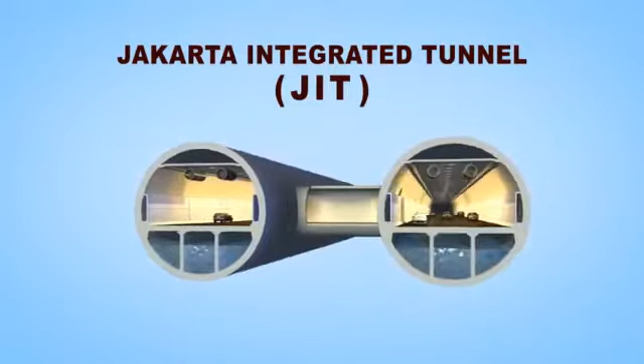Jakarta is the capital city of the Republic of Indonesia with a population of around 10.2 million people in 2011. But for the Jakarta metropolitan area, or Jabotabek, it has around 28 million people, which is the biggest in Southeast Asia or the second biggest population in the world.

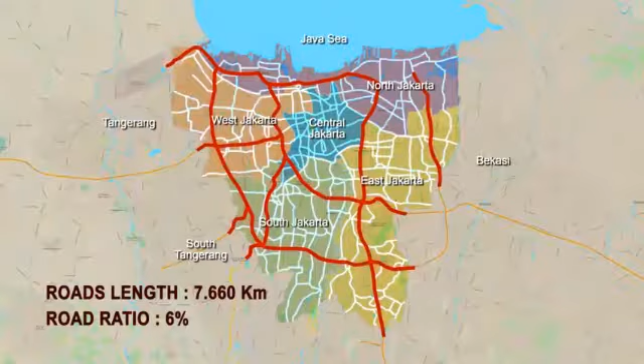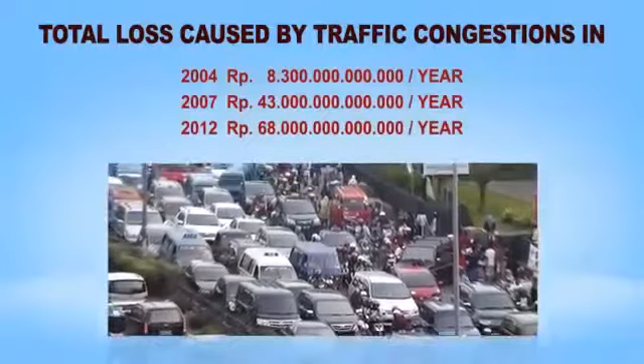Jakarta has only 7,660 kilometers length of roads, covering road areas of around 4,000 hectares. The ratio of roads in Jakarta is only around 6% of the city area. Total amount of motor vehicles in Jakarta is around 9.6 million in August 2014. These motor vehicles are always increasing rapidly year by year and cause severe traffic congestion in almost the entire city area. The classical problems of Jakarta city are traffic congestion and flooding.

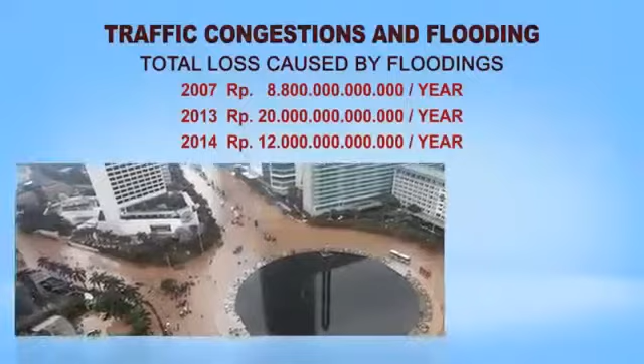The basic concept of flooding management in Jakarta was given by Professor Herman van Breen in 1918, when Jakarta was called Batavia under the Dutch colony. In this concept, Batavia city was entrenched by a flooding channel.

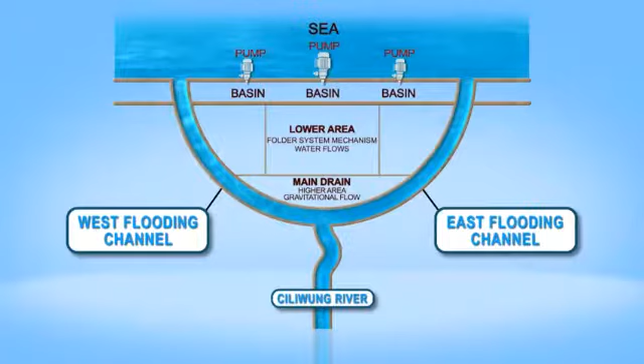In principle, this concept is to limit or restrict water rainfall coming to the city from the upstream area by building a half-circular flooding channel. Whereas since the volume of rainfall in the city has become less, it can be managed by building several drainage channels inside the city.

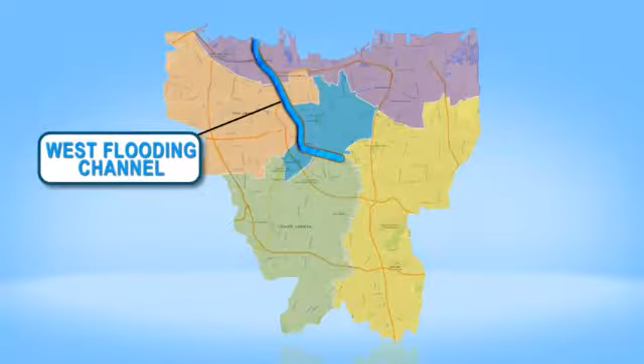The Dutch have built half the portion of the flooding channel to cover surface water flow from the southwest bound area of the city. This channel is well known as Kanal Banjir Barat, or West Flooding Channel. Just a few years ago, the provincial government of DKI Jakarta completed this flooding channel by building the other half portion of the channel in the east direction, the East Flooding Channel.

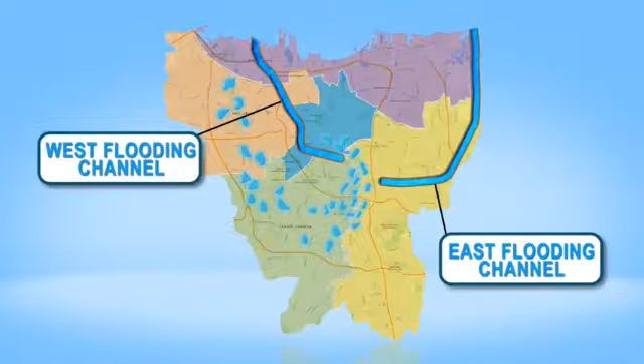However, now a new problem has arisen. The old Batavia has already changed and become a bigger city called Jakarta. The flooding channel is not bounding around the city anymore, but now located in the middle of the city. Therefore, a new model of flooding mitigation is urgently needed at the southbound of this flooding channel.

The best answer to all of those problems is the Jakarta Integrated Tunnel, or JIT. JIT is a solution to traffic congestion and flooding problems, and at the same time, it can give a solution to the lack of electricity and standard clean water supplies of the city as well.

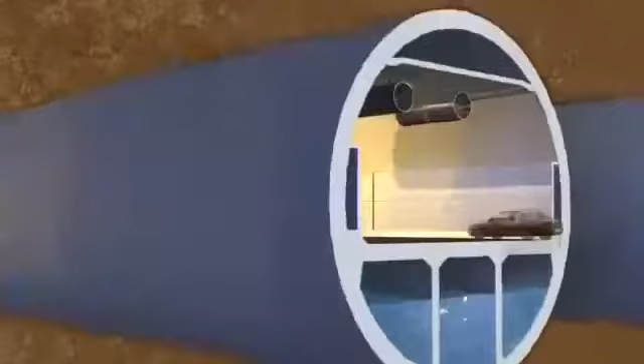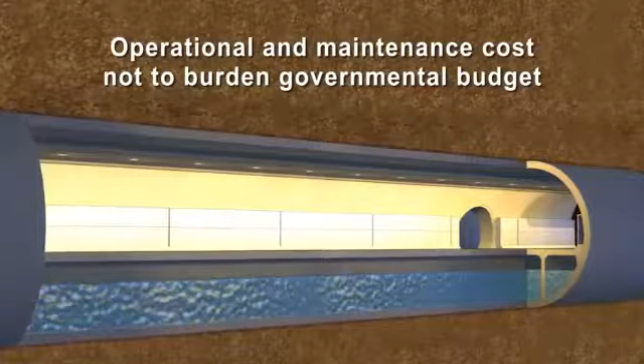Actually, it is becoming an obligation for all governments in the world to build and finance a flood controlling system facility, because not even a single private company will come to step into such a zero return project. In order to overcome this constraint, in the Jakarta Integrated Tunnel concept the flood controlling system is integrated into a toll road system. So the JIT system relatively will not burden the government budget, especially in operational and maintenance of the project.

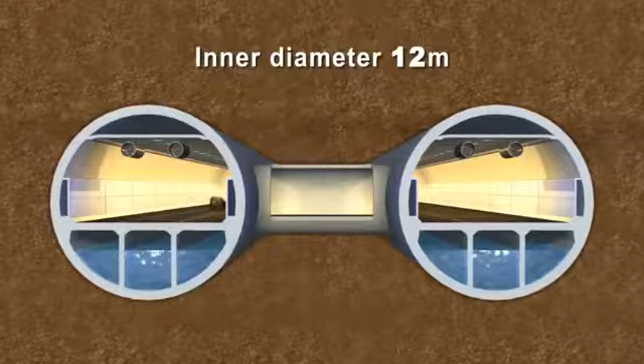Jakarta Integrated Tunnel System is a twin tunnel or double-barrel system of 12 meters inner diameter each. There are 3 lanes of toll roads in each tunnel.

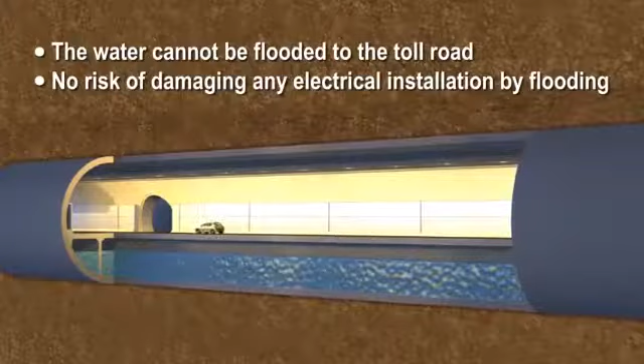In the JIT system, the function of flood controlling and toll road is totally separated. There is no need to build a water gate inside the tunnel to separate and alternate these two functions, wet and dry condition, such as needed in the single tunnel system. Therefore, there is no risk of the water flooding to the toll road at all.

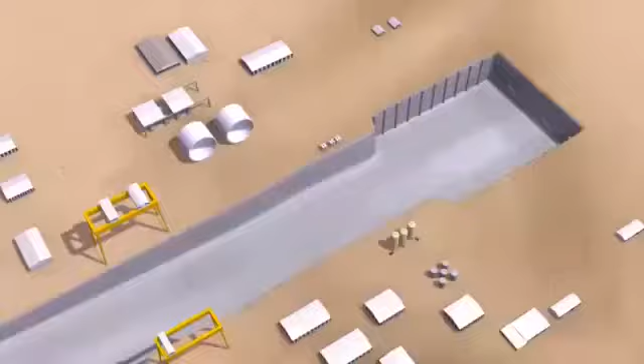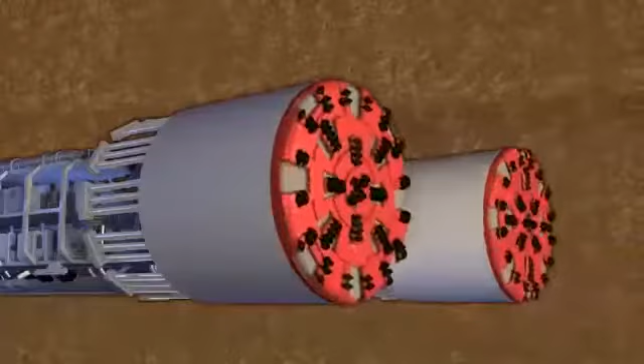Since there is no land acquisition needed, or only limited at both ends of the tunnel, tunnel construction can be done in a very fast and safe way using a tunnel boring machine, or TBM. While the machine is moving ahead, it is followed by installing precast concrete segments to form tunnel linings or tunnel walls.

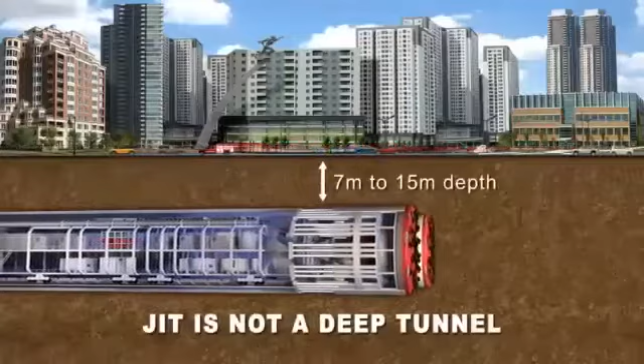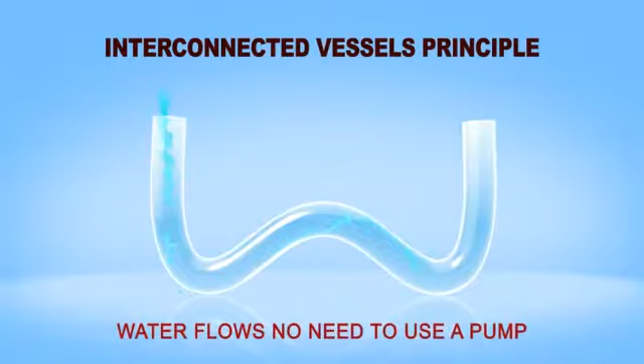The route of Jakarta Integrated Tunnel is chosen under an existing road or under an existing railroad. By doing this, it can assure to avoid long and deep pile foundation of buildings and to get a good compact subgrade formation. During construction stage of TBM, there is no or only limited disturbance to the existing activities on the surface.

So, if water is being poured into one vessel of an interconnected vessel, then the water will flow through the tube into another vessel until the height of the water level in both vessels become horizontally even. Water flows inside the tunnel is ruled by a gravitational law, and therefore, there is no need to use a pump, except for the purpose to re-empty the vessels.

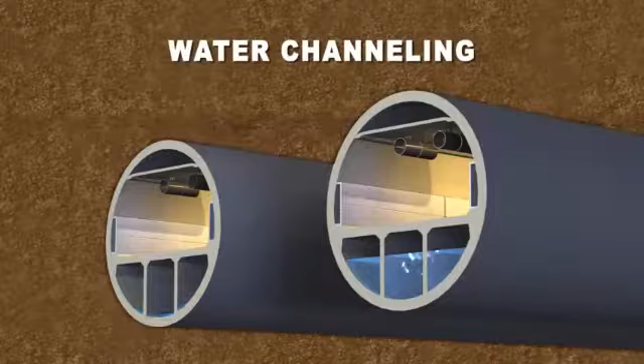Maintenance of wet area of lower channel can be done one by one alternately among each tube of the twin tunnels. When one tube is being emptied, then the other tube is still keeping on function in channeling water. With the continuous functioning of water channeling, the JIT system can also be utilized to build a micro hydroelectrical power system and as a water channel to cater for standard clean water supply to the city.

At the first stage, Jakarta Integrated Tunnel will build JIT-1, Balekambang-Manggarai Corridor, with a total length of 12 kilometers. This tunnel is to mitigate flooding caused by overflow of Ciliwung River and to reduce traffic congestion at southbound to city center corridor through Pasar Minggu Casablanca toll road section of 9.60 kilometers length.

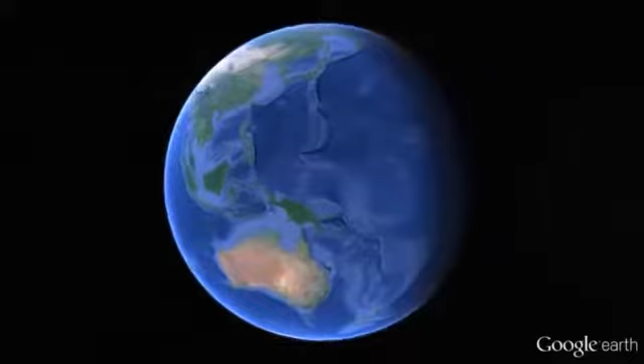This tunnel is stretched under the ground just right below the existing road, which starts from Pasar Minggu at Pasar Minggu Street and goes to Pancoran Junction, Dr. Supomo, and Dr. Saharjo Streets at Tebet area, up to the end in Manggarai at West Flooding Channel.

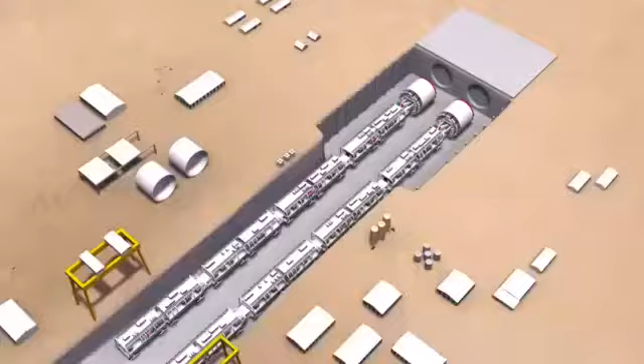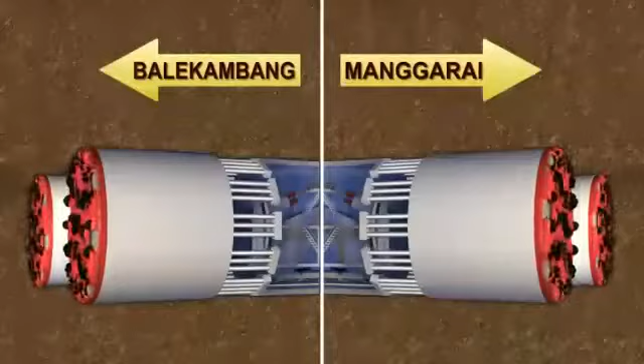In order to shorten the construction period, method of boring can be done in two opposite directions simultaneously. Starting from the middle of the route at Pancoran Junction, two pair sets of boring machine can do these jobs by boring two directions of Manggarai and two directions of Balekambang at the same time. Schematic Jakarta Integrated Tunnel System for Corridor of Balekambang, Manggarai.

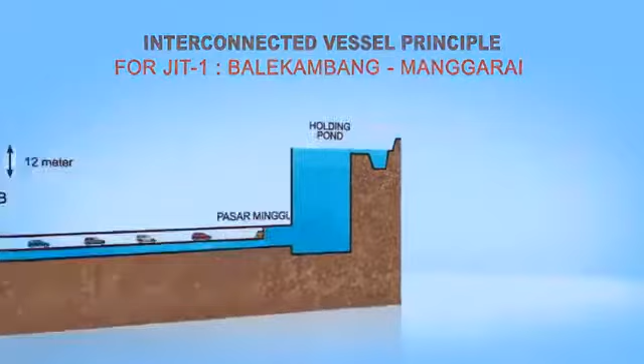After completion of construction JIT-1 Balekambang, Manggarai, the problem of flooding caused by overflow of Ciliwung river, such as at the areas of Balekambang, Kampung Pulo, Kampung Melayu, Kalibata, Bukit Duri, Otista, Dewi Sartika, and Jatinegara will be overcome.

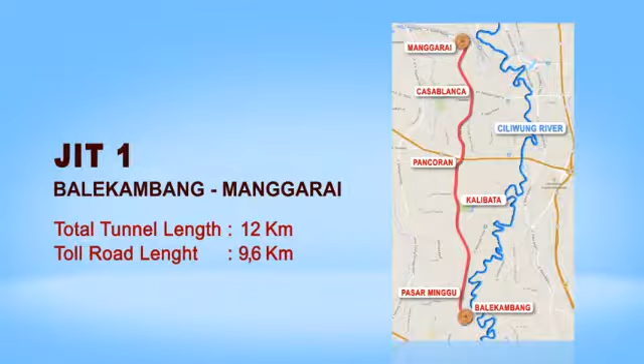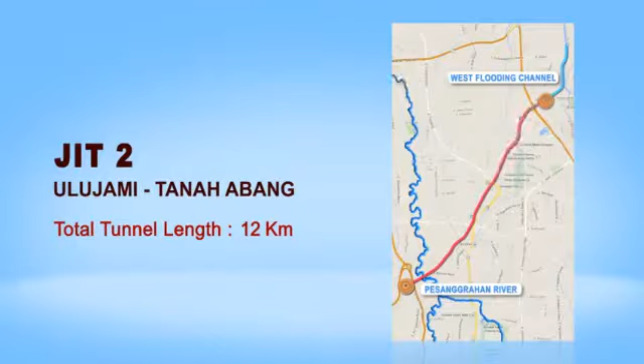Besides JIT-1 Balekambang, Manggarai, with the same method at this first stage will also be built JIT-2 Ulujami Tanah Abang Corridor of the total length 12 kilometers. This tunnel is to mitigate flooding caused by overflow of Pesanggrahan River and to reduce traffic congestion at southwest to city center corridor through Ulujami Tanah Abang toll road section of 8.30 kilometers length. The sixth toll road section in Jakarta City.

At the first stage, two of the six sections of toll roads in Jakarta City will become two main JIT sections. Firstly, toll road section number 6, Pasar Minggu Casablanca as JIT-1, and secondly, toll road section number 4, Ulujami Tanah Abang as JIT-2.

In the next stage, it is strongly recommended that all of these toll roads will become JIT tunnels in order to complete the basic concept of flooding management in Jakarta, which has been introduced by Professor Herman van Breen, so that all of other local flooding spots can also be overcome by these huge JIT drainage channels.

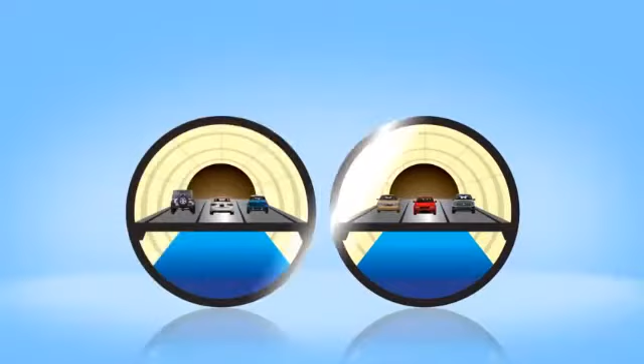The Jakarta Integrated Tunnel or JIT is a giant leap and gateway towards a better and a new Jakarta. But of course, it is not only applicable to Jakarta. It will also become a solution to all metropolitan cities all over the world. So, JIT is just in time.